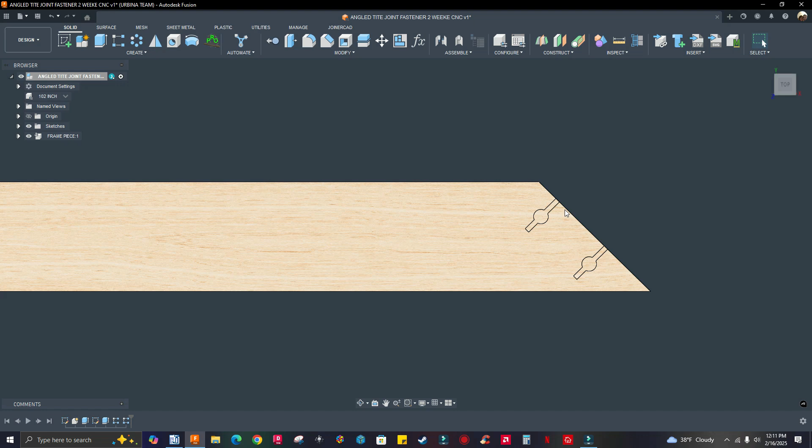Alright guys, in this video I'm going to show you how I program this frame piece that has two 45-degree angle cuts and it has 4 grooves for Tite Joint fasteners, okay? And this model is configured. Okay, I have two configurations for two different sizes. So I have, you see on my browser on the left, I got 102 inch and 113 inch.

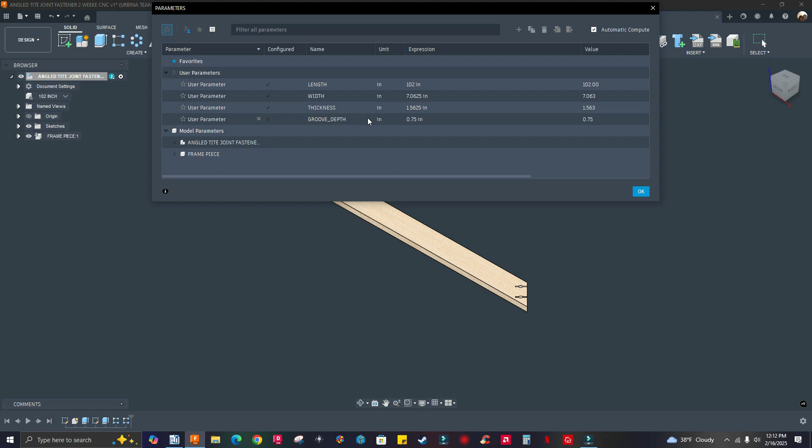Okay, go back to 102. This model is parametric as well. If I go to change parameters, FX, see that it's parametric and it's configured. All right, click OK. So let's go to manufacture workspace. And the first thing I'm going to do is create a new setup.

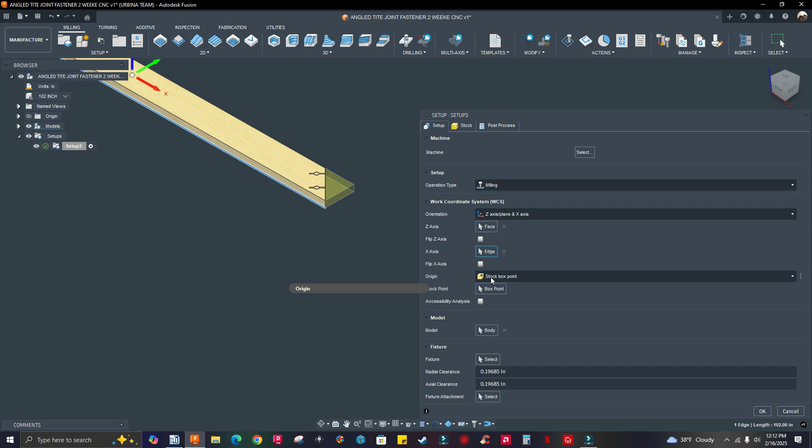Okay. And if I go down to model, see where it says body, it's already selected for me. I don't have to select the body or the component. All right. So my first selection is going to be Z axis. Click on select its face. X axis is going to be this edge. Origin, stock, box point. Click on box point. I'm gonna zoom in, select this bottom point. I'm gonna flip the x-axis. I can just click on it. There it is. All right.

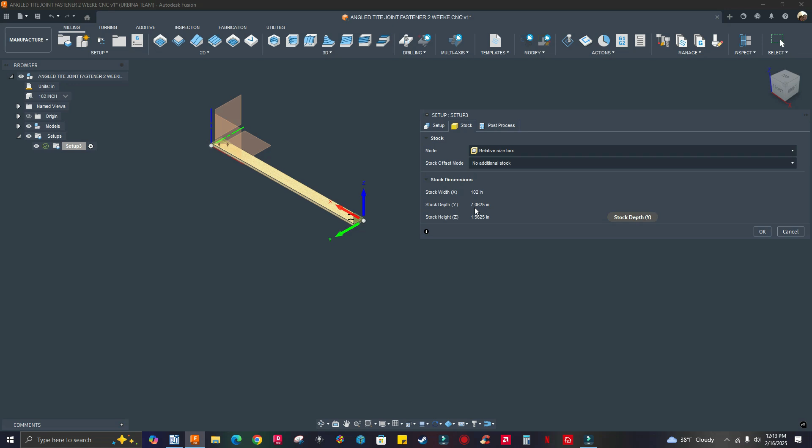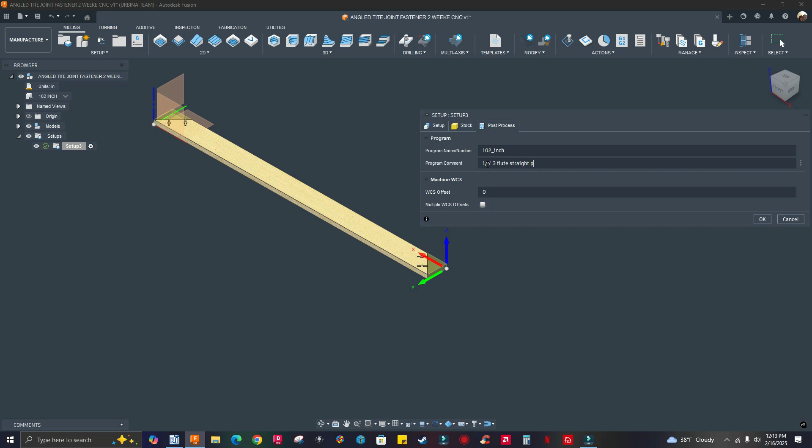Now I'm gonna go to stock, and this is the size of this panel. Post process. The program name is gonna be 102_inch. Program comment is gonna be quarter inch, 3 flute straight plunge. That's the tool that I use to machine these pieces. All right. Click OK. That's my setup. I can name the setup if I want. I can name it frame piece. Hit enter. Okay.

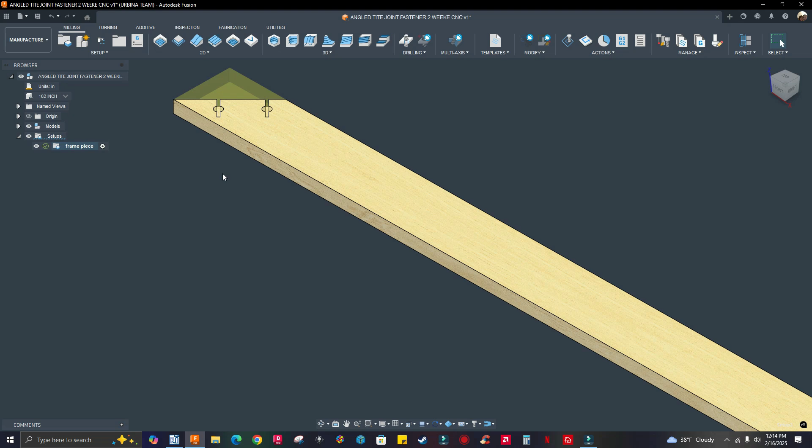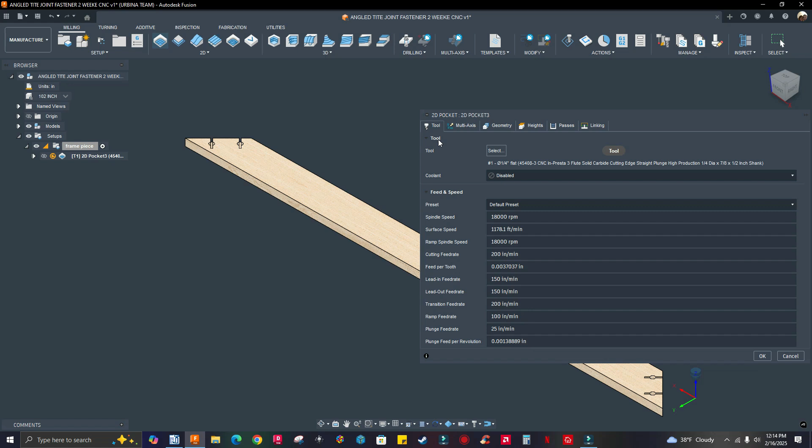Now I'm ready to apply machining. All right, and it's gonna be a 2D pocket. So I'm going to my 2D menu. Select 2D pocket. If you don't have it here, just click on this arrow and go down to 2D pocket. All right. I'm gonna have to select my tool. I'm gonna go down to the Weeke Optimat BHC 350 inches wood flat end mills. It's quarter inch right here. It's a 3 flute. I'm gonna select it. I got all my feeds and speeds set up for that tool.

I'm gonna go to geometry. I'm gonna select pockets. I'm gonna check on this box. Select same plane faces. It's only gonna be one selection. Okay, select this face, zoom out, and everything else gets selected. All right, click OK. Heights tab. This is what I have. Passes. Tolerance. I use 0.2 millimeters, so type mm because I'm working in inches. This is the best tolerance that works for that old pod and rail CNC machine. Smoothing deviation is always set to 0.

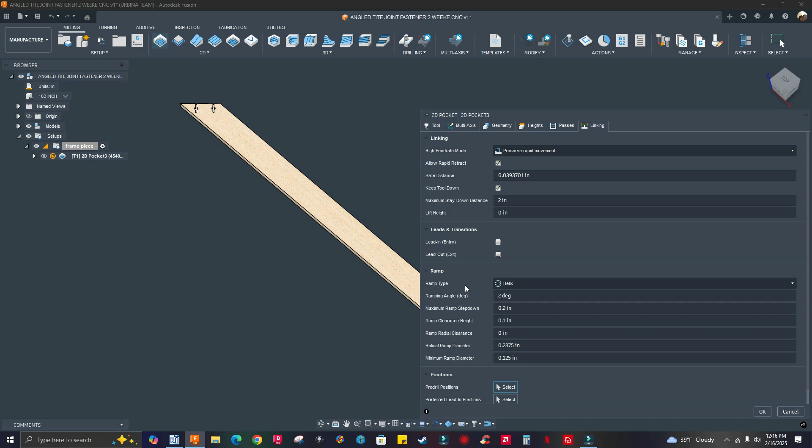I'm gonna uncheck stock to leave. I'm gonna check multiple depths, and my maximum roughing step down is gonna be 0.2 inches. That's gonna be the same for finishing step down, 0.2. I have use even step downs checked. Linking tab, I'm gonna uncheck lead in and lead out. Ramp type is gonna be plunge. Click OK, and I'm done programming this piece. It was very fast, guys.

All right, and you got to get into the habit of using configurations, especially if you're doing the same job, but it has different widths, different depths, or different thickness. Just make sure your design is parametric, and then make sure that you configure your model and start adding different configurations. Okay, so let me post process this program. Right click, post process, woodWOP inches, post.

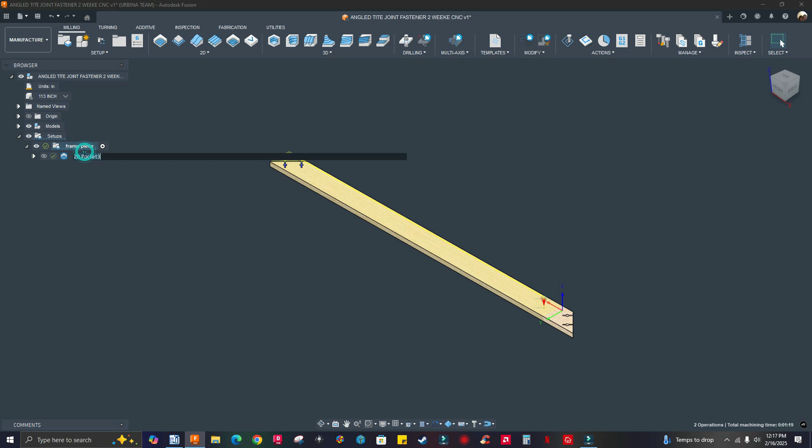Now I'm gonna use the second configuration, which is 113 inch. Select that. So I'm gonna have to regenerate the toolpath. So right click frame piece, generate, yes. If I go back to 102, okay, I didn't see that. This yellow icon indicates the toolpath is out of date, so you're gonna have to regenerate the toolpath. So let me do that again. Right click, generate. So that's the first one.

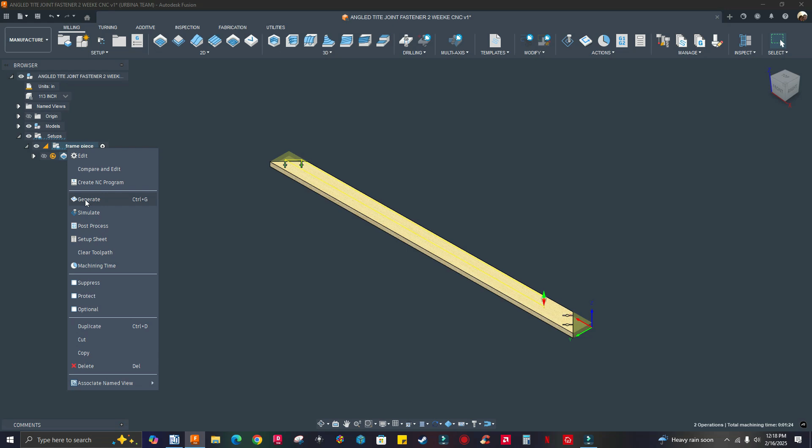Let me post process this one. I think I post processed 113 first. So let me post process this again. Post process, post. Yes, I want to override it. Okay, now I'm gonna change to 113 configuration. Now I see the out of date toolpath icon. So right click, generate, or Control G on your keyboard. Okay, and that's my second program. So I can right click.

Okay, change the name of the program to 113 post. Let's go to woodWOP 5.0. All right, file open. Select the second one. That's 113. Okay.

I think you guys noticed on the shorts video when I was running this job on the machine that I was using a piece of plywood, and I was using that just because I didn't have a straight edge in the y-axis. Because the piece has a 45-degree cut, it was kind of hard to keep that piece straight. So I needed to have something right here to keep the piece straight, and also to make sure the origin was set to zero.

So if you don't have a straight edge to position the part perfectly, you've got to use a piece of wood and make sure you type the right thickness. When you open the program woodWOP and you type that thickness, if it's X or Y, in my case it was the X-axis, so POX, that's part offset X, I have to type 0.71 inches. That was the thickness of that plywood piece that I used.

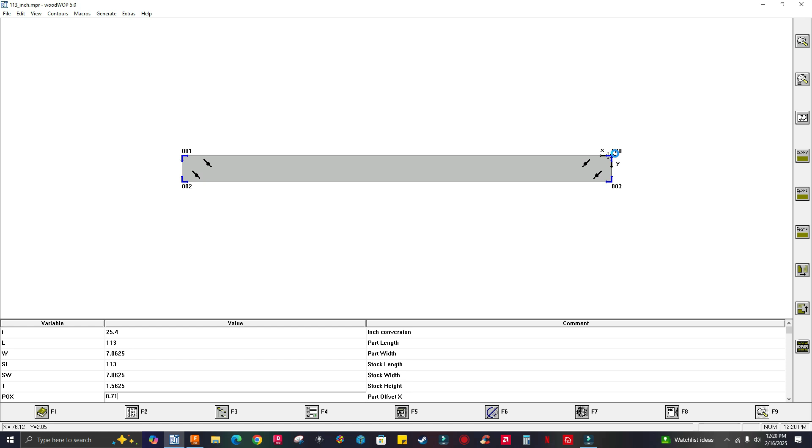So I'm gonna right click on the screen. You're gonna see the change here. Oops. Actually left click, and you're gonna see the change here. See the offset? So now I made the change in woodWOP, but I'm gonna have to save it before I run this program on the machine.

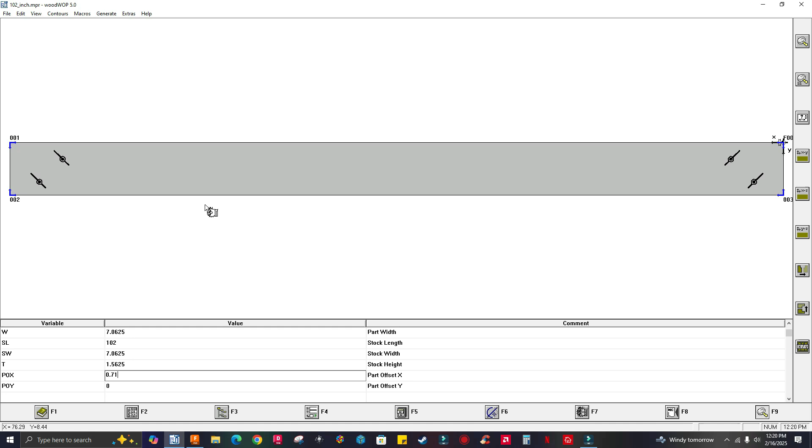So file, save. All right, and I'm gonna open up the other program, 102 inch, and I'm gonna type the same distance in the POX variable right here, 0.71. Left click on the screen so you can see the change right here. See the offset, file, save. So I'm ready to run these programs on the machine. All right.

You might be asking yourselves why I'm typing the offset here in woodWOP but not in Fusion. Well, I'll show you why. Okay, let's go back to Fusion.

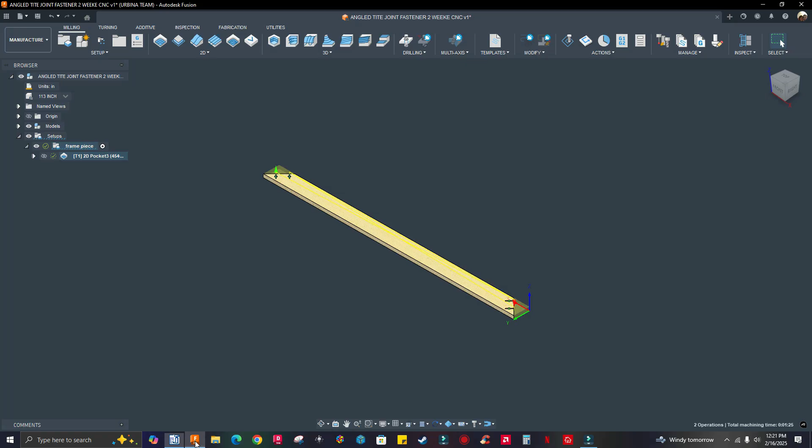Go back to Fusion. Sorry, you hear the door opening all the time. I got my daughter going in and out. Okay.

Anyway, if I select the frame piece setup, right click, edit, I go to stock offset mode. See, I have no additional stock. Click on this arrow. I can go to add stock to sides and top bottom. So actually, no, it's the last one. Sorry about that. Add stock to all sides.

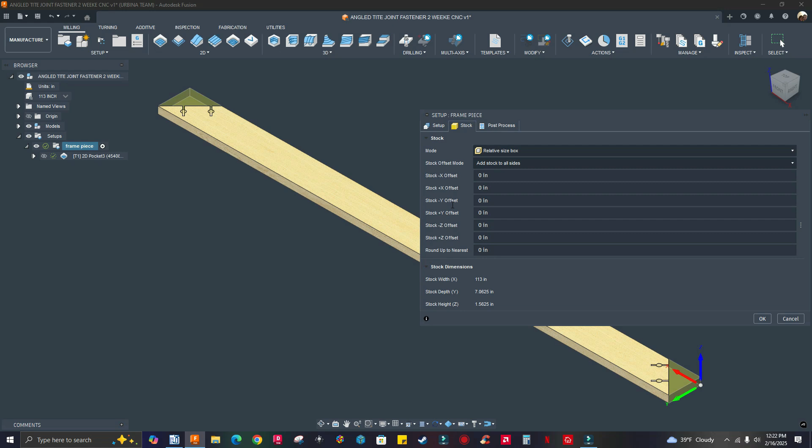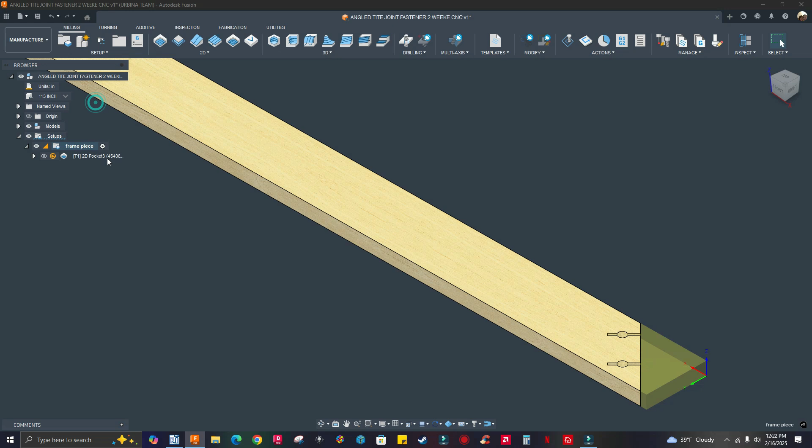So I'm gonna type 0.71 inches in stock minus X offset because I'm adding the stock right here on the right, so it's minus going this way. So it's gonna be stock minus X offset. All right, so 0.71, and I'm gonna click OK, and I'm gonna have to regenerate the toolpath. Right click, generate, because it was out of date. And that's because I made that change, right? I added that offset.

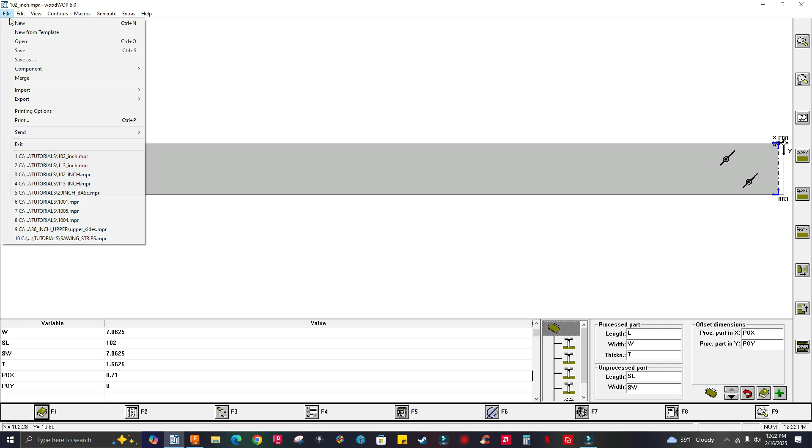So let me post process this program. Right click, post process, and this is 113 underscore inch, and let me type 2 so you can see the difference. Right next to inch, post. Let's go back to Woodwop 5.0, file, open, that program, and you see the distance is not really in inches. So it's converting to millimeters, but it's not really millimeters, it's actually inches.

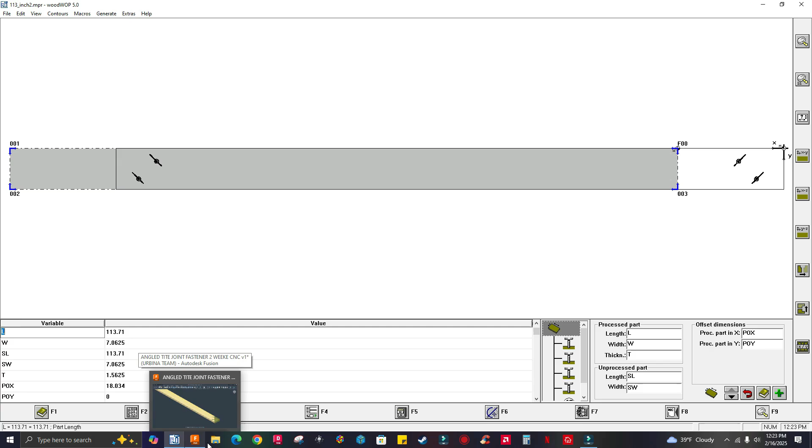So it's 18.034 inches. And so the offset in X and Y does not work in the Woodwop post processor in inches. Okay, it only works in millimeters. So let's change my manufacture workspace to millimeters, and you'll see. Let's go back to Fusion, same program. I'm gonna change the units from inch to millimeter. Click OK.

Okay, right click, generate. That's my daughter again. Sorry about the noise.

So I have this toolpath generated. So right click, post process. Let me select the woodWOP post processor in millimeters. Okay, I don't see it here, but I selected it, because this is one of the issues when working in dark mode, it's gonna be hard to see the text. All right, so I think it's set to millimeters. So let me post it. Yes, I want to overwrite it.

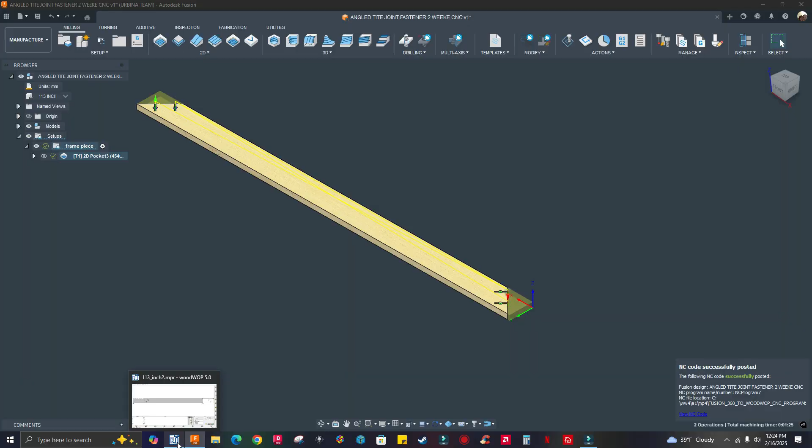So let's go to woodWOP 5.0, file, open. Look at that. So I got the right offset or distance, whatever you want to call it. See that? So for this offset to work, you're gonna have to be using the metric Woodwop post processor. Okay. I just happened to change that post processor from millimeters to inches. I did that myself. Okay.

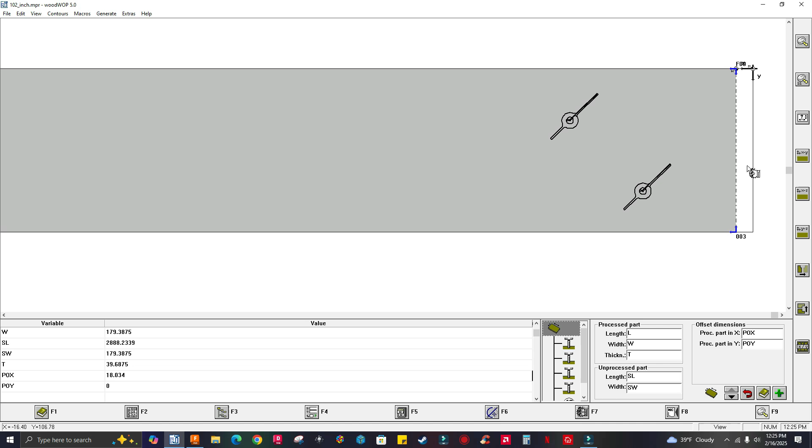But I'm not able to fix this issue in the post processor, so I'll play around with that maybe another day, and I'll just make an update video. All right. But you see, to have the right distance or offset, you will have to post in millimeters, not in inches, okay? And guys, that's it for this video. That's all I wanted to show you.